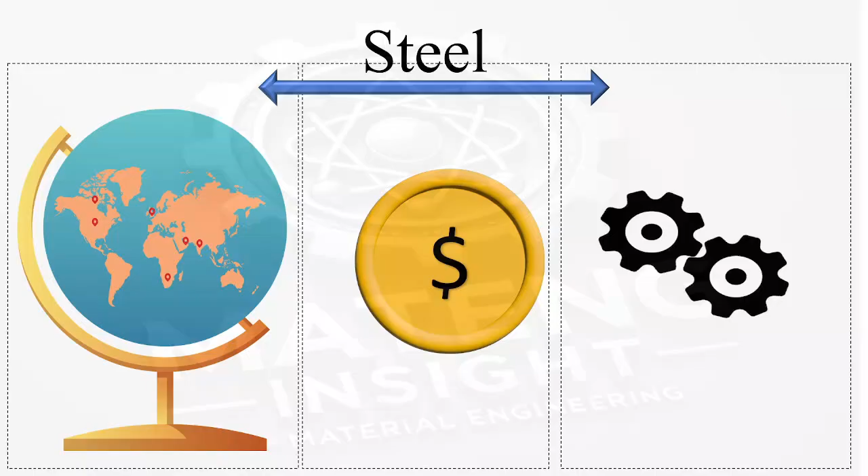Let's begin with this question: why is steel still important? Due to its abundance in the earth, low cost, good mechanical properties, and the ability to achieve desirable properties by adjusting its composition, steel is incredibly important to us.

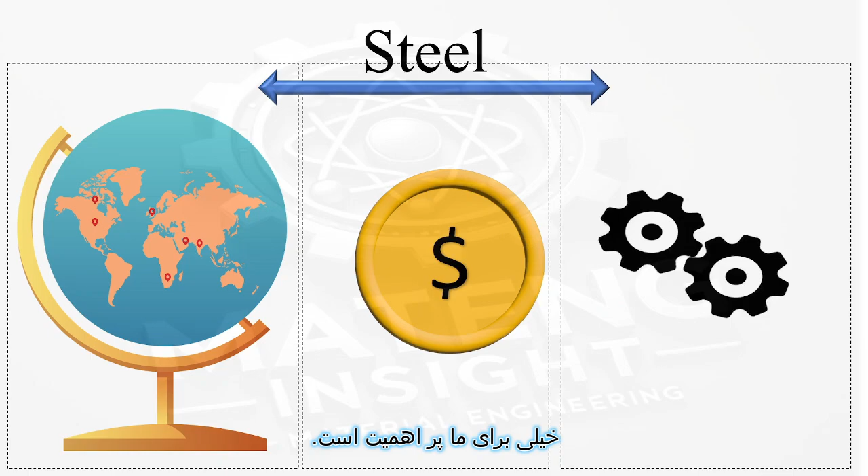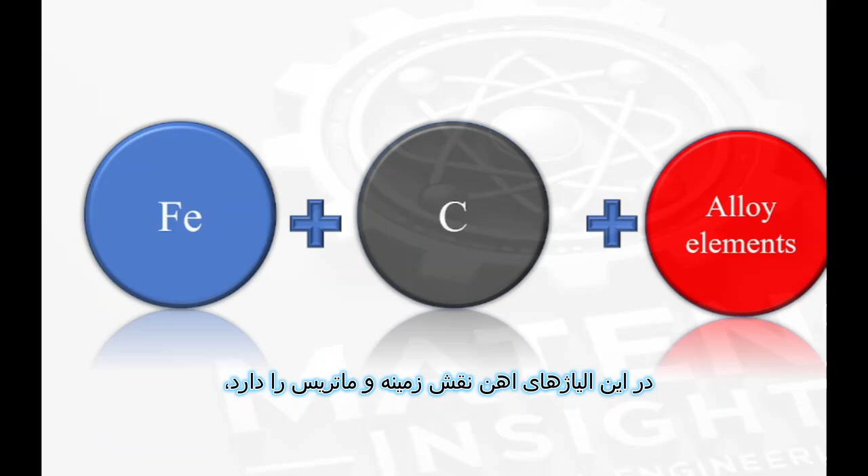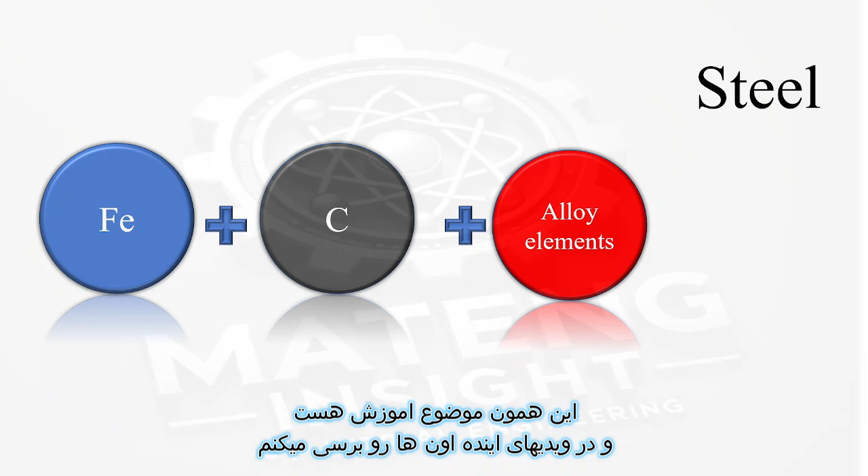Next question: what is it? Steel is an alloy made of iron, carbon, and other alloying elements. In ferrous alloys, iron forms the base, actually the matrix, and carbon is the main component that strengthens it. But what about the role of the other elements? That's the subject of this course, and we will discuss it in future sessions.

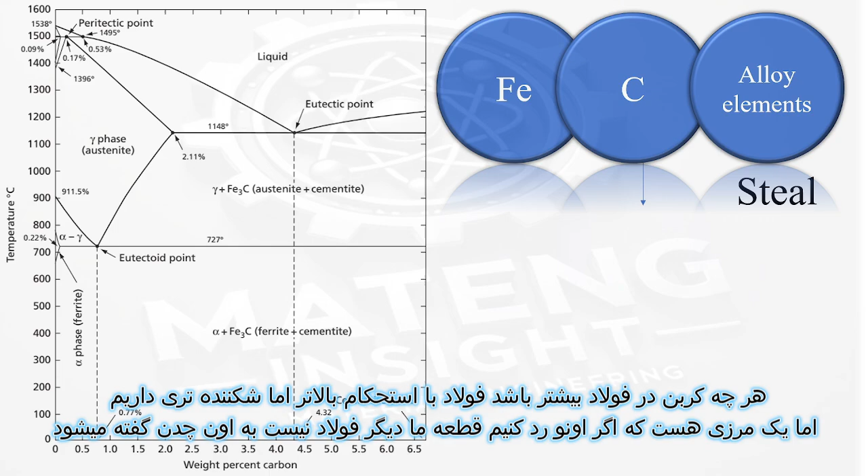When we look at the iron-carbon diagram, we see three main transformations that occur in steel while it is heated. The more carbon contained, the stronger the steel, but also the more brittle it becomes. However, there is a threshold beyond which the material is no longer steel but cast iron. Where is the threshold? When the carbon content exceeds approximately 2%.

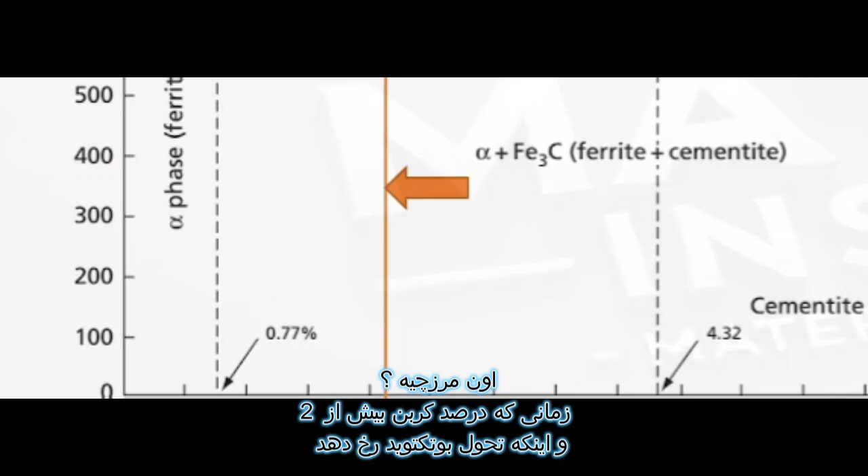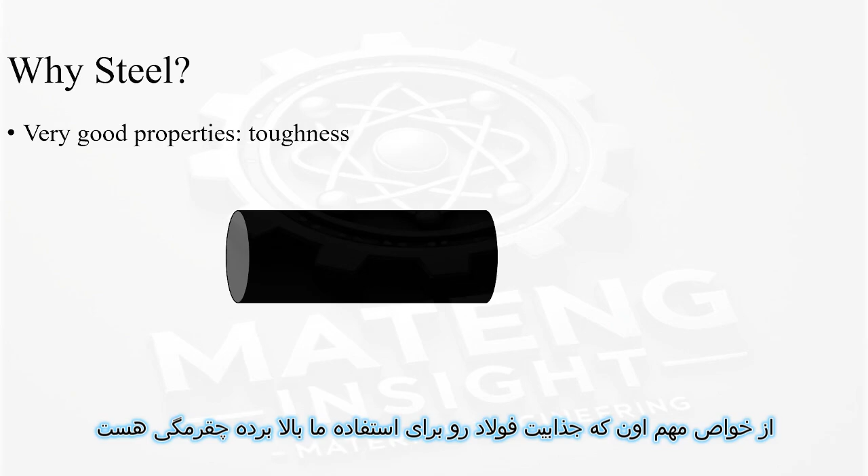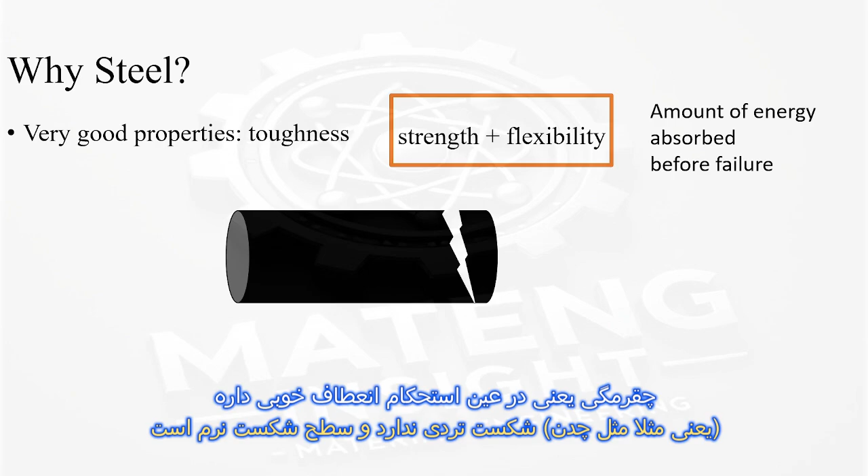You get a different transformation. When we talk about the advantages of steel, we mentioned its good mechanical properties. One of the most important properties that makes steel attractive is toughness. Toughness means that while being strong, it is also flexible, meaning it doesn't fracture in a brittle manner like cast iron, and has a smooth fracture surface.

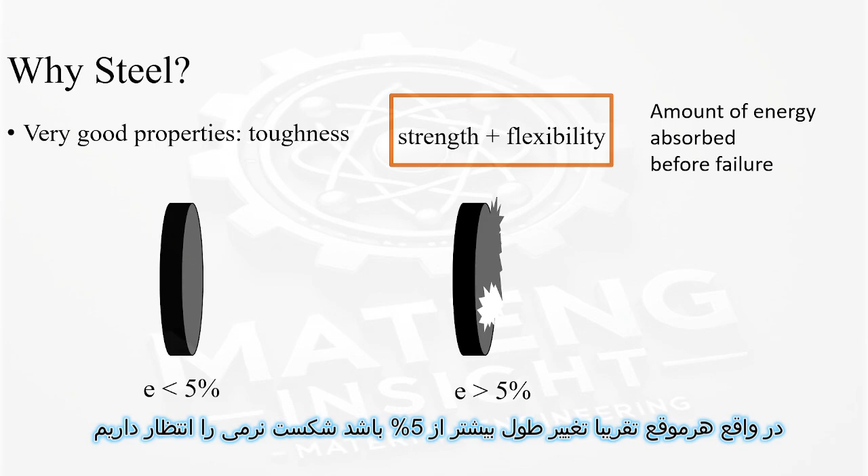In fact, whenever elongation of the material is more than 5%, we can expect a ductile fracture. When we apply tensile force, it elongates, and the result produces a curve that shows steel's behavior. At first, we observe a completely linear behavior, meaning as we apply stress, the material elongates. Beyond this point, the linear behavior changes.

However, if we release the material and stop applying stress at this point, it will return to its original shape like a spring. So, up to a certain point, the material exhibits elastic or spring-like behavior. Beyond this point, the material yields and plastic deformation begins.

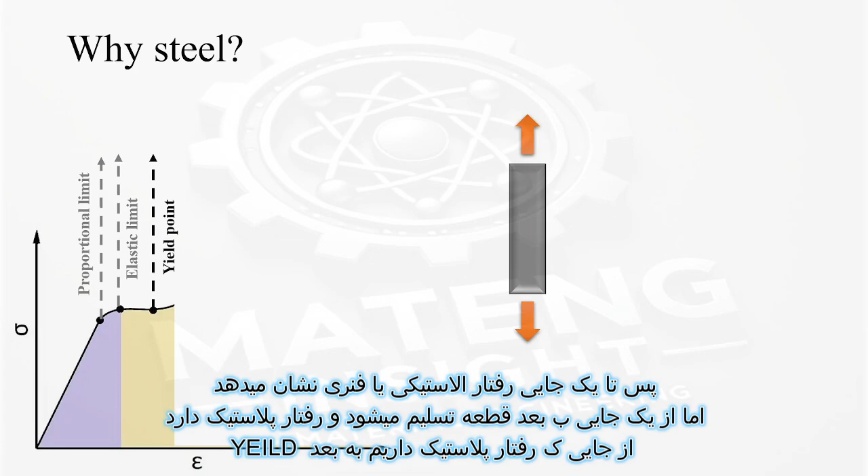We call it yield. The material can undergo plastic deformation until necking occurs, meaning a localized thinning in the specimen. After this, the material breaks and fracture occurs.

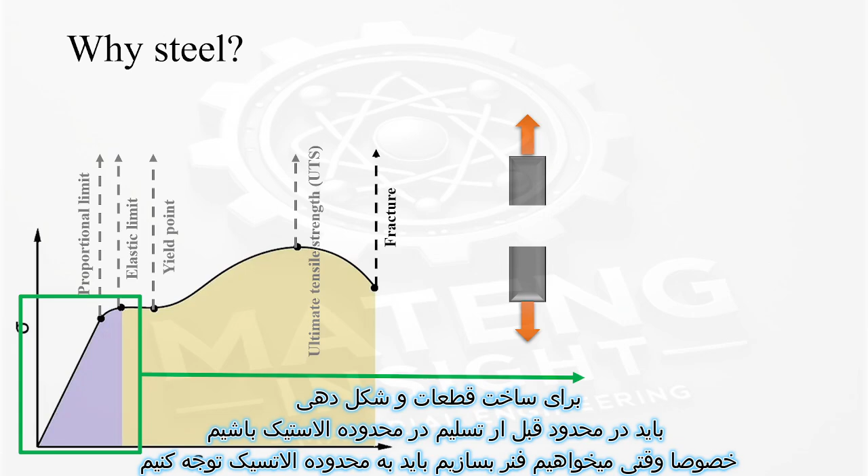During manufacturing, especially during forming processes, we need to stay within the elastic range, particularly for manufacturing springs. In order to design a spring, we need to focus on the elastic region.

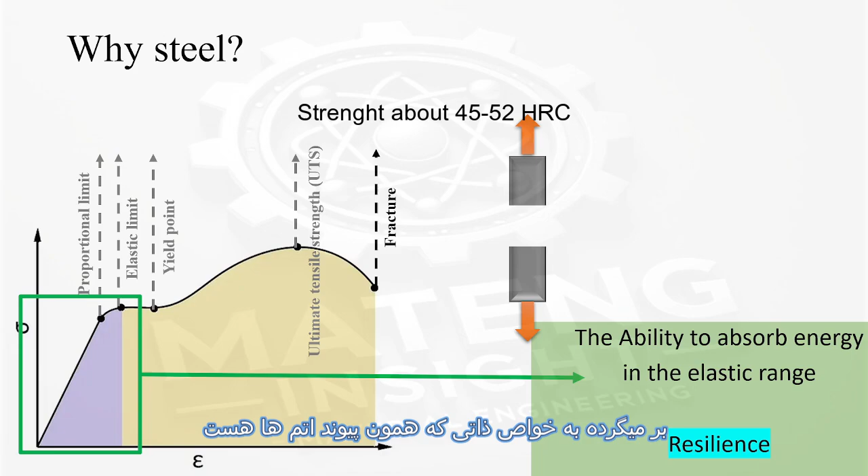There's a parameter in this area, a resilience region called Young's modulus, which depends on the intrinsic properties of atomic bonds. So how can we increase this region? By increasing its strength. How?

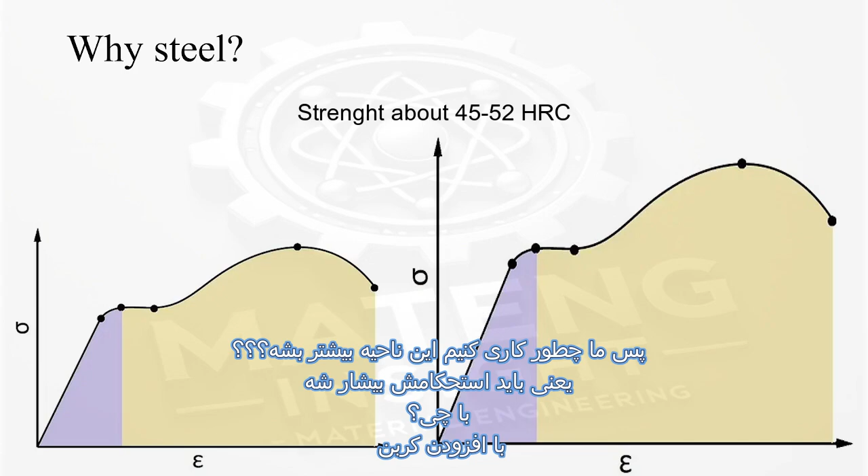By adding carbon. The material becomes more capable of forming the martensite phase, which increases strength by adding carbon. But the specimen becomes less ductile and more difficult to weld. So the carbon content plays a significant role in naming steels.

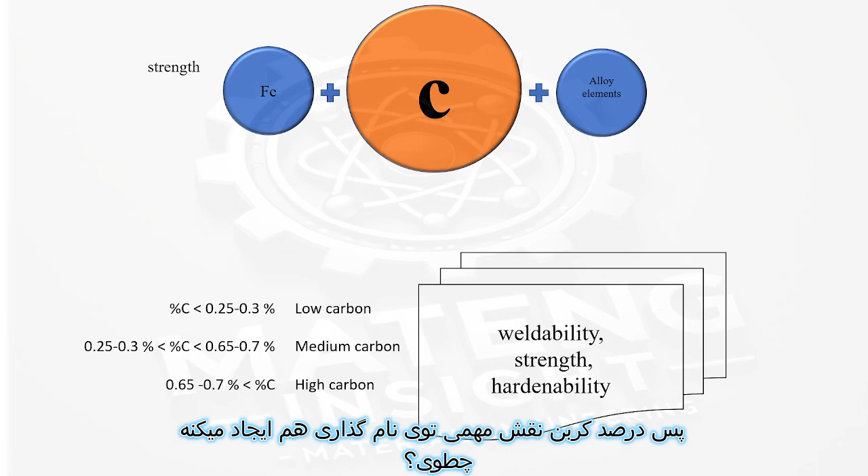How? If it's a plain carbon steel, meaning it's just iron with carbon and no alloying element other than 4 elements: A, B, C, D. They are manganese, silicon, phosphorus, and sulfur. They are always present in steel.

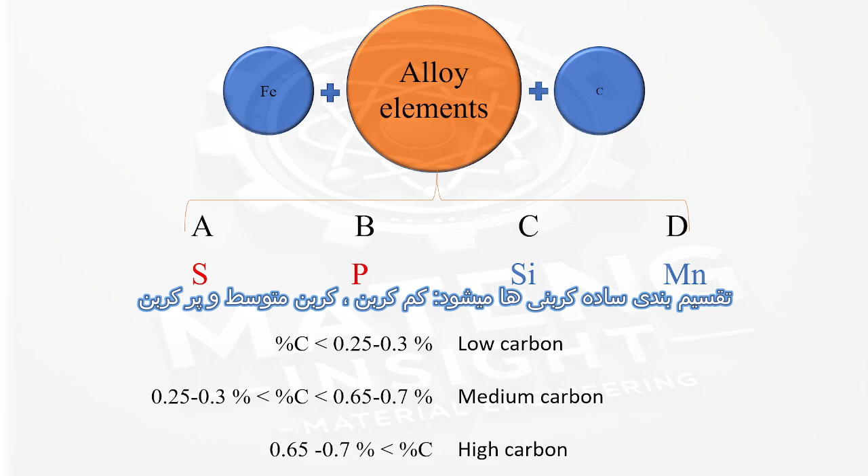So why are some of them marked red? Because the red ones bring undesirable properties and the other ones bring desirable properties. So plain carbon steel is classified as low carbon, medium carbon, and high carbon steel. I believe now you can tell me which category shows more strength, and which one is better for welding.

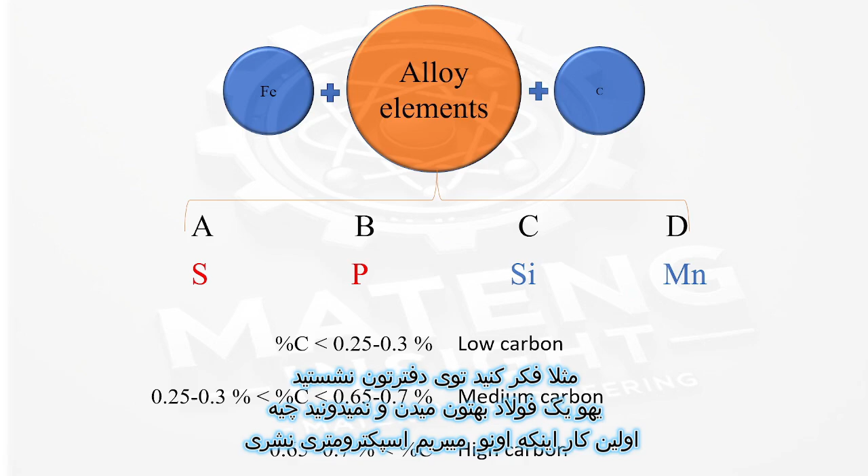Imagine yourself in your office and you receive an unknown steel specimen. The first step is to take the specimen for quantometry testing. The outcome of this test is a table full of elements with different percentages, but do all these elements play an important role in recognizing a specimen?

Iron is the base. Carbon is always present. In addition to these, we always have the 4 elements we mentioned before. So what about the other ones? The EN 10020 table is going to help us.

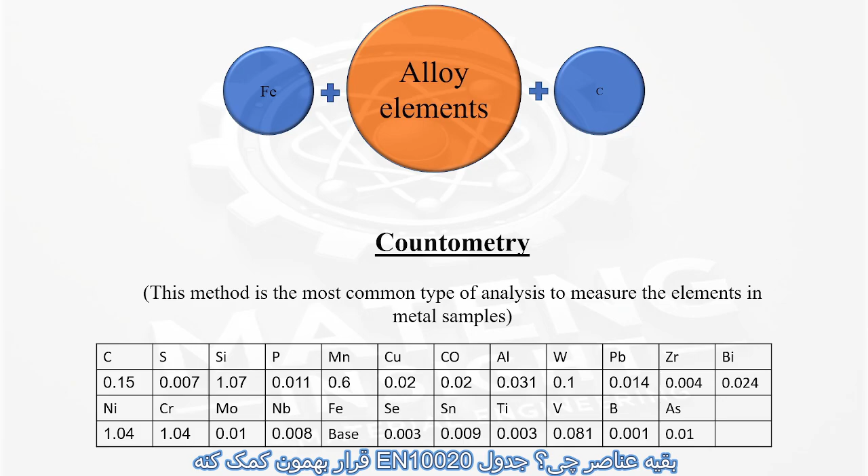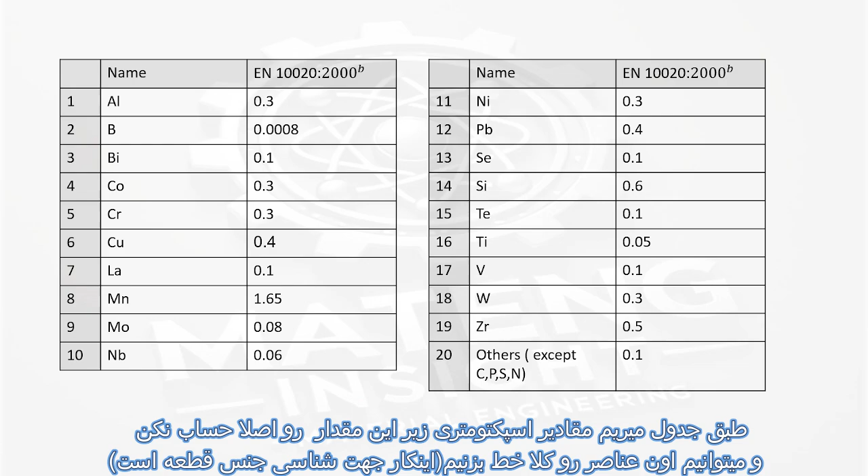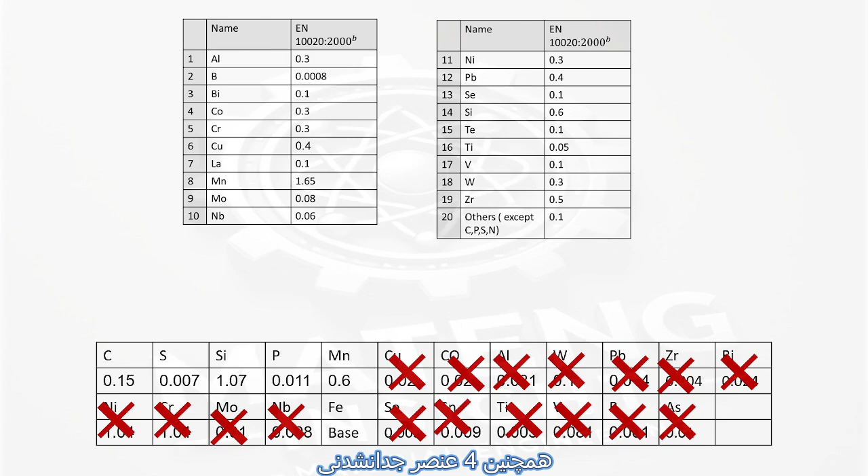This table tells us to only consider values above a certain threshold. So now we are able to cross out the elements that are lower than the critical value. So now, in addition to the iron base, we can see 0.15% carbon and the 4 inseparable elements, with undesirable ones being low. So we have a clear carbon steel.